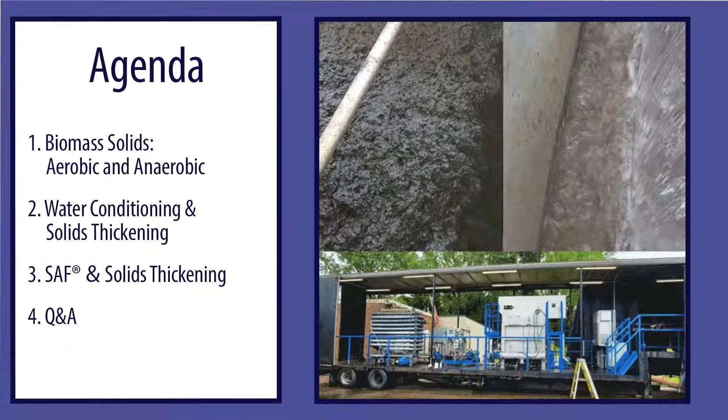Of course, we first have to define what that paradigm for solids thickening is. I thought I might just take a few minutes and talk about what thickening is, and first off, what are those solids? Typically in wastewater plants, industrial wastewater plants, you've got a primary stream, which is the raw water coming directly out of the plant, and that generally goes through some kind of pre-filter or pre-treatment technology. Very typical is a flotation technology, of course, which our technology, SAF, is one of those available.

So there's usually screens or some type of flotation technology, and then either it goes on to a POTW or some kind of discharge, or it may go to secondary treatment that the plant may have, where we've got biological processes. Of course, those processes are creating solids, and there's two that we typically deal with, one being aerobic, the other anaerobic solids.

We're going to hit on all three of those: primary, aerobic, and anaerobic, the two subcategories in secondary or biological solids. So typically what's done for primary, other than, I think people rely on their flotation to do thickening for the most part. Occasionally you run across where people have additional thickening or dewatering technologies. But secondary, of course, we see that even more so.

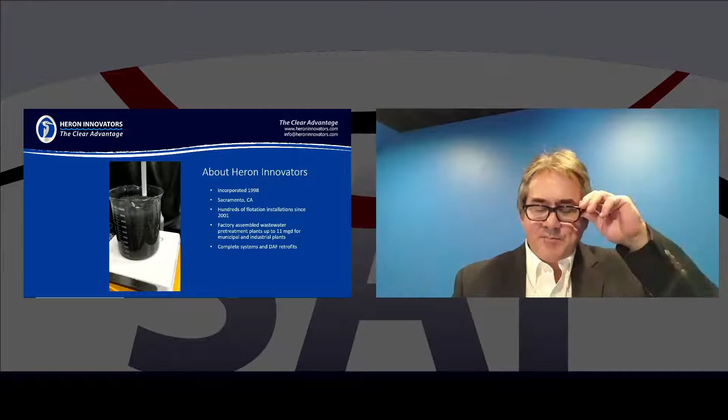I was walking a trade show, and I think it was FPSA, talking with a chemical vendor. That fellow mentioned SAF to me, and he said you can get by with less polymer with SAF. That piqued my interest - I thought I ought to check into it. He gave me John's number, I gave him a call.

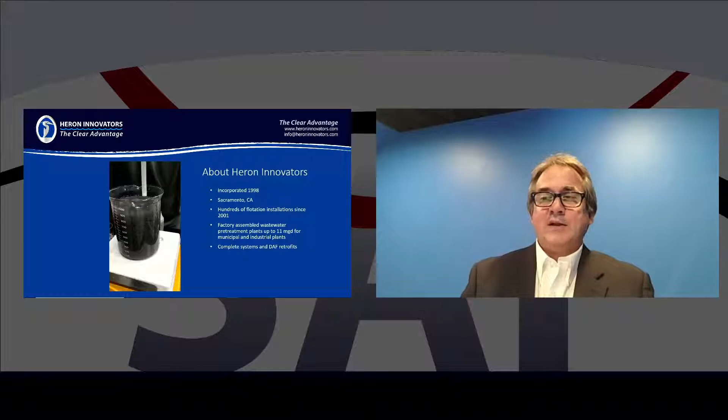This was all 3-4 years before I went to work for Heron. I called up John, and we started talking about this SAF technology, which I had never heard of before. John met me in Arkansas at one of my clients, and what you see in front of you is a jar test that we did in their lab. We had gone around throughout that morning and grabbed samples from various points in a number of their plants.

This particular jar has water that had gone septic - it had sat in a wet well for several days, the pump was down. This was some pretty nasty water, it stunk. So what you see - and I'm going to start this video here in a second - we've got a pin floc formed. There was a little bit of coagulant, a little bit of polymer. The coagulant breaks those solids out of solution, polymer helped bring them together, but maybe a half a ppm or 1 ppm of polymer. And this tube is coming from John's SAF lab unit.

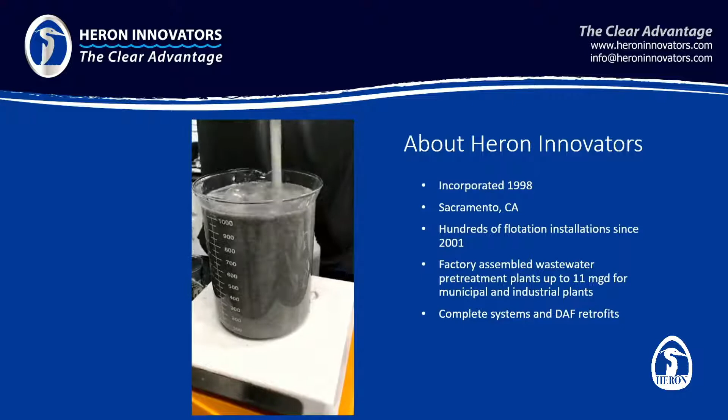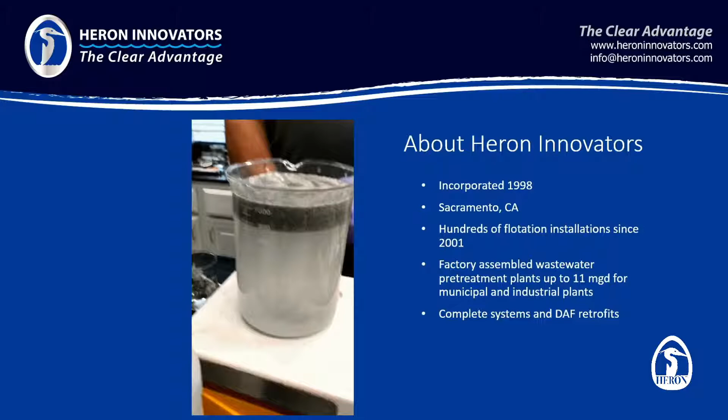So we're about to inject a charged microbubble froth, which is unique to SAF. Let me start this. I think what you see is those particles actually getting bigger as the air attaches, and what we're getting is a very high capture rate, a very fast rise rate, and a very stable float - all three of which was something I had never seen before. In fact, the environmental manager from this company said 'Wow' when we saw this.

So I went along with him, and we visited 3 different SAF installations across 3 different states. We ultimately ended up back in California, and we're going to talk about that application in a little more detail. But first, let's talk about SAF - what is SAF?

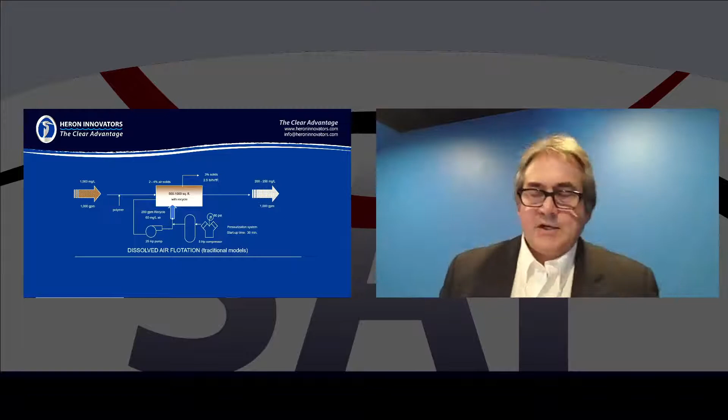Let's start by contrasting SAF with the traditional technology, dissolved air flotation. John, a lot of times we like to use the slogan: flotation without dissolved air. So the question is, how do we do that? What we're showing in this diagram is a flotation vessel, so you've got influent coming into this tank.

This could be a rectangular tank. There's also round tanks out there that are DAFs. And the way most of them work is you've got a recirculation stream going on here where you've got a recirc pump, and that's pushing against back pressure, and you've got air being injected into that.

So at pressure, air dissolves in water, and what we're going to do is dissolve that air up to the saturation point. How much is dependent on laws of physics, temperature, pressure, as well as the conditions of the water as far as how dirty that water is. So where that saturation point is depends on all those conditions, but when that water then re-enters the flotation vessel, you're now at a lower pressure, so you've exceeded saturation.

So little bitty soda pop bubbles are going to come out of solution, and they're going to work to float the flocculated solids. They're actually going to lift those solids from underneath, be floated and skimmed off and disposed of, and then into the thickening process. We'll come off of this at a certain thickness. What we'll talk about a little bit more is what do we typically see with the DAF, what do we see with SAF?

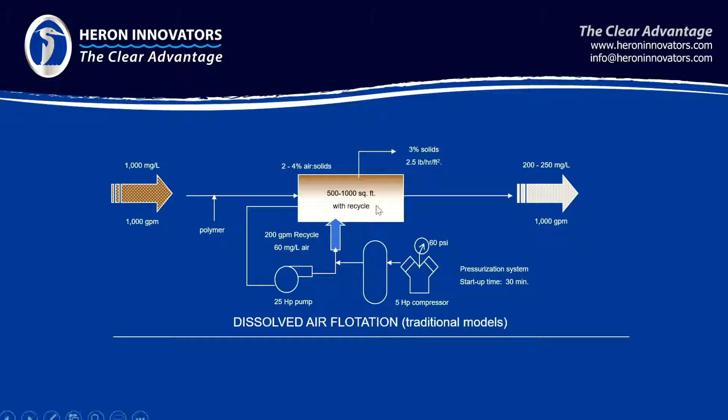So let's talk about SAF. As I said, SAF is flotation without dissolved air. So instead we're going to create a charged microbubble froth with a froth generator. It's a little skid, about 4 by 4, 4 by 6 foot in footprint, and it's going to make charged microbubbles. This froth is 40% air by volume.

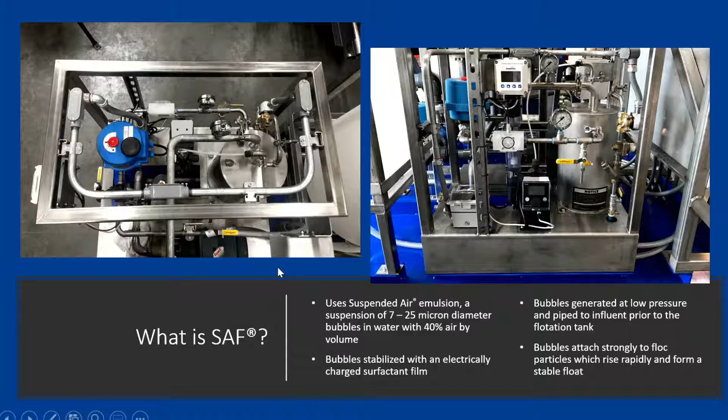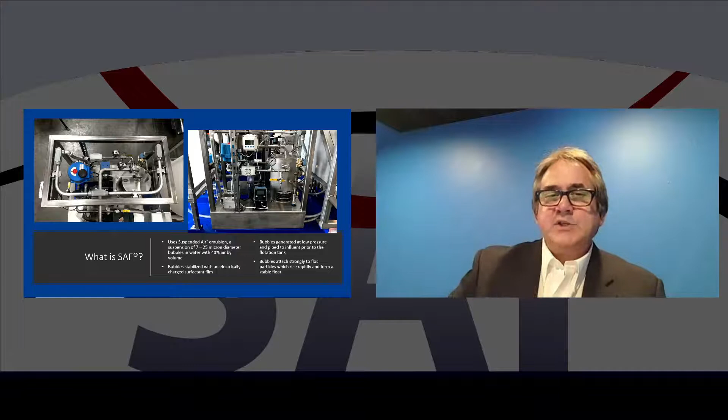And I'm going to ask John to explain a bit what these bubbles are. A lot of times we're saying, well, you're just getting more air into the system. Well, John, elaborate on that. What's different about these bubbles compared to traditional flotation bubbles?

Yeah, our bubbles are covered in a surfactant sheath that are 7 to 25 microns in diameter. And that sheath, that surfactant, gives us both surface tension advantages and charge advantages. It's electrostatically attracted to the particle. So we overcome the surface tension issues of the particle, and with that charge advantage, we see about 1,000 times the affinity for attaching to a particle in solution.

Given that our air doesn't coalesce readily, it takes a few minutes. A lot of our air is used, it's received better. We get a lot more air on the particles, and with that we get not only the charge effect on the size of the particle, giving us kind of a coagulation effect, which allows significant reduction in treatment chemistry, as well as a really fast rise rate because so much air gets on the particle.

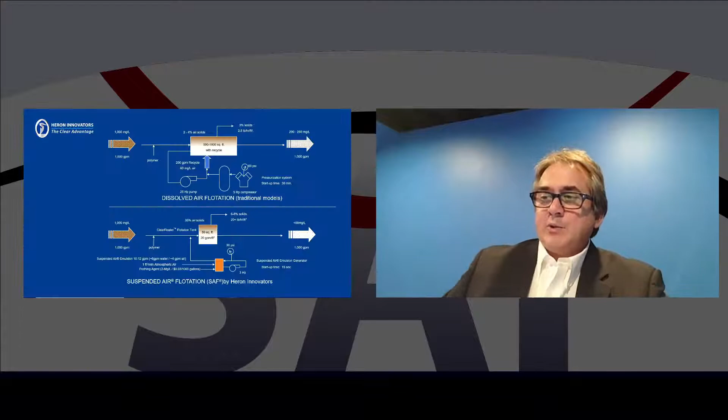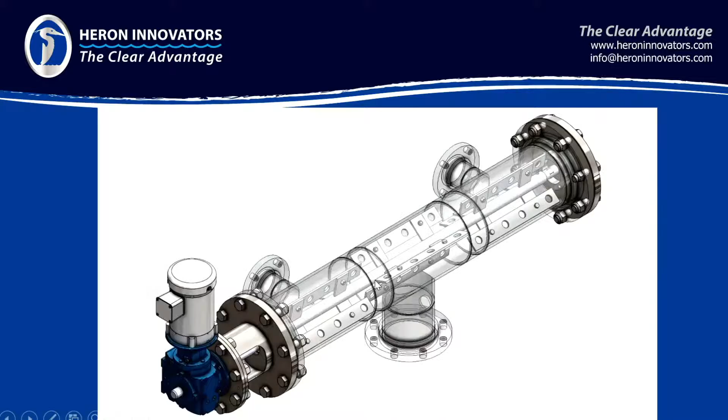So those bubbles, that charged microbubble froth, is injected here, 40% air by volume instead of 2 to 4% air that you normally see with the DAF. Is that right, John? It's about right. Saturated is usually 2 to 5%, actually used air is more like 2%. So a lot of coalescing goes on. So then the froth is injected here.

So the influent coming in, the froth is injected here where it's stirred in, and this is what we call a clear mixer. We've got the clear floater for the flotation cell, and then the clear mixer. So these paddles are turning, this shaft is turning about 10-15 RPM, driven with a motor at variable speed.

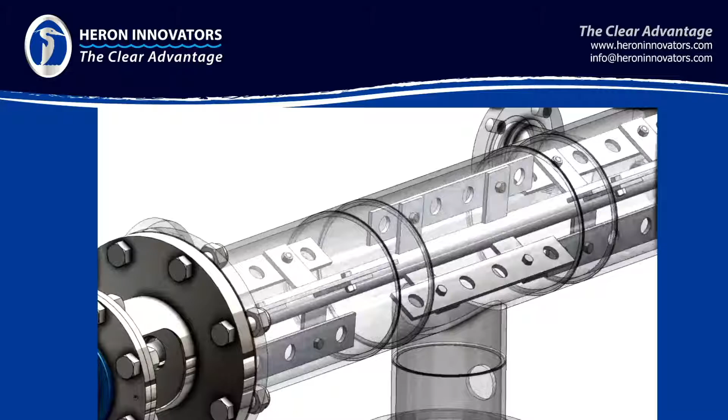So we're going to just stir those bubbles in to get a good air to particle reaction. Those bubbles are going to be attracted, because of the electrostatic attraction, to attach and encapsulate the solids just prior to going into the flotation cell. So that all happens right here, and then we go into the flotation cell.

We've got a lot of ground to cover. We've gone through SAF here real quickly. If you've got any questions on that, please feel free to type that in the chat. But let's move on.

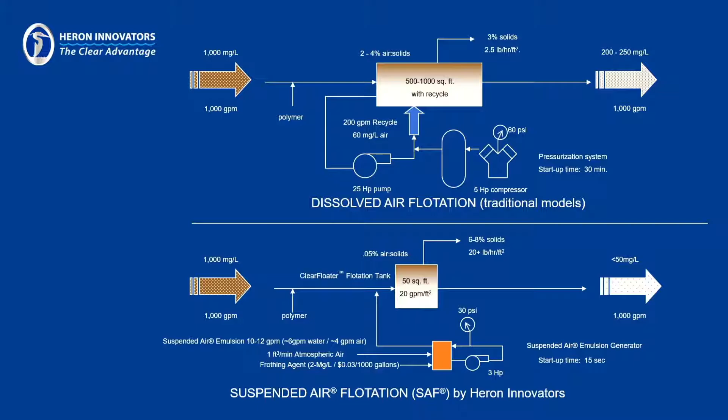It generates what the literature calls an aphron. What we've been able to do is figure out how to scale that, and it's all done in these SAF generators. One of the beauties of our SAF generator is that by the turn of a diaphragm valve, I can provide more or less flotation air to the process.

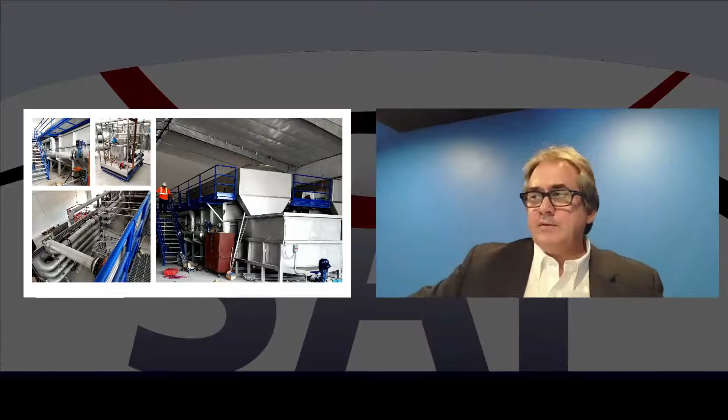In this picture on the right-hand side - what's the flow capacity of this unit, John? That's a CF1000. It's 140 square feet of float area, and that'll take you to about 2,800 gallons a minute in a solution that's, I think, under 5,000 parts per million. Don't quote me on that number, I have to go do the engineering on that again.

Bottom line is we've had this comment a lot - our footprint is just incredibly small compared to traditional flotation. If this were traditional flotation, would it be a fair statement to say this would be 3-4 times the size? Yes, I think that'd be a fair statement. We've got another tank right here.

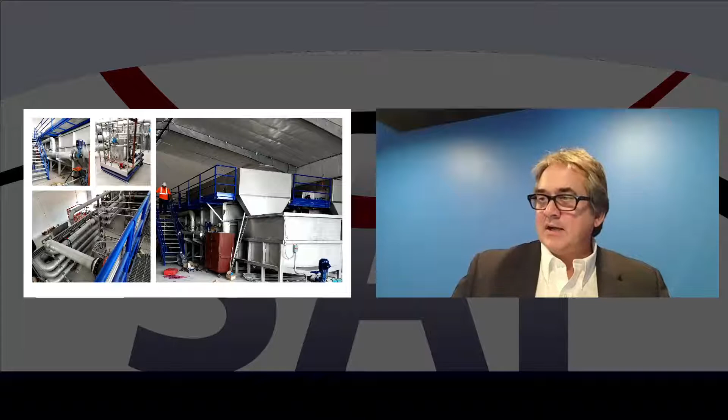So that really gets into solids thickening. This particular client is doing a second decant step. They're accomplishing solids thickening on the top by simply controlling the rake speed, as well as putting it on a timer - we can turn it off and on. Because the solids are so stable, they'll float for hours, which allows dewatering.

Another thing, John, I know I've seen you do this at trade shows - you'll actually take the solids in a jar test, put them in a beaker, seal it, shake them up, and they'll float again.

So I'll elaborate - we were at a small in situ trade show at a sewer plant where local sewer plants came, and we did just that. We took the solids, floated them in a mason jar, put the lid on, shook it up, and it refloated immediately. The operators were so enamored by that, one of them actually grabbed the bottle and started shaking it and redoing this - I think he did it 14 or 15 times before he finally resuspended all the solids for good.

That talks to what Jeff's slide was just showing, where we can skim off the top of our unit, get it as dry as we can, or dewater it to the degree we can. Then you can drop it into a container like that, let it sit, and it will float again. When it floats again, you'll get another 10-20% more dewatering, to the point where - that's a poultry plant there - they're easily above 30% solids consistently.

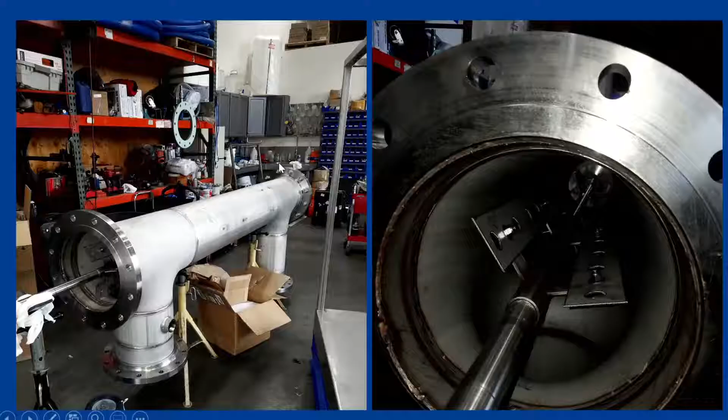This is one being assembled in our shop. You've got a drive on one end, this shaft with paddles. This is VFD controlled, influent coming in here. You've got the froth injected here. This is where we get that air to particle reaction, and then this would be attached to, this is the very last step before it goes into the flotation cell.

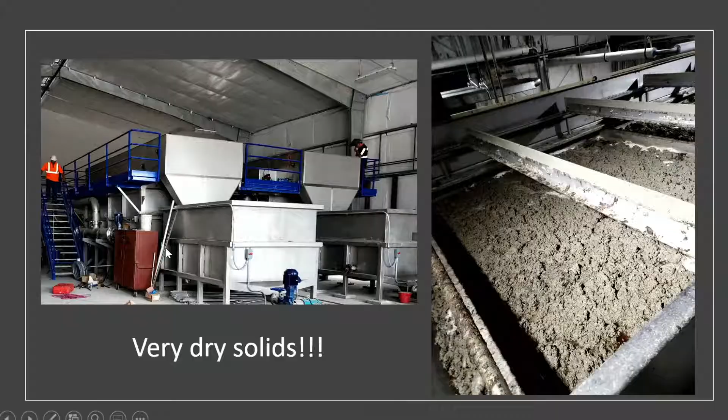And of course, this is turned 90 degrees. But back on this tank here, coming off an existing serpentine floc reactor, we custom built this, where this bolts to the flotation cell, and these were actually mixed liquor solids. So let's talk a little bit about what kind of performance we got on that.

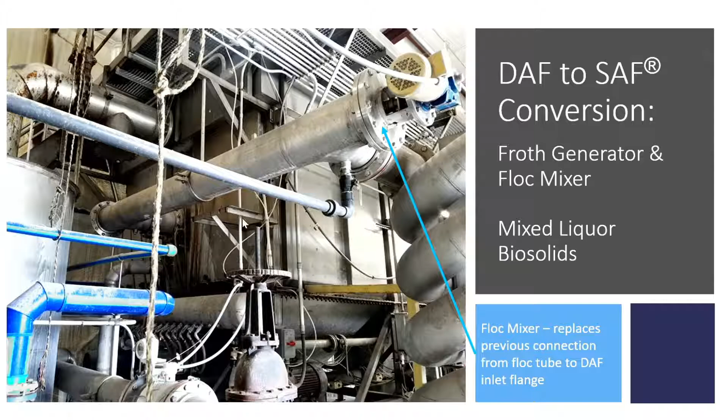John, anything you want to add on this? Well, I'm going to pull up a spreadsheet while you're talking. Yeah, so these are mixed liquor solids.

They're both from an MBBR. The primary flow is from an MBBR with clarifier thickened solids fed in intermittently during the day. So we'll see several thousand parts per million solids net coming into that float cell.

That float cell was restricted. They were doing, before we got there, that was a very large float cell, and they were kind of maxing out at 4 to 5 pounds per hour per square foot on the top of that, making it very difficult to reintroduce the clarified thickened solids from another downstream plant.

So in this installation, from the day they put that DAF in, they were at capacity, always trying to deal with how to reintroduce these solids from the downstream operation while continuing to treat the solids coming from the normal MBBR. It was, according to the client, a very difficult balancing act. We did the retrofit, and they haven't had capacity issues since.

And while achieving, I think, Jeff, you're going to show the slides, so I won't steal your thunder. I'm gonna turn it over to you, let you go. All right, yeah, I'd love to show this slide because this was what I thought was a bad experience for me.

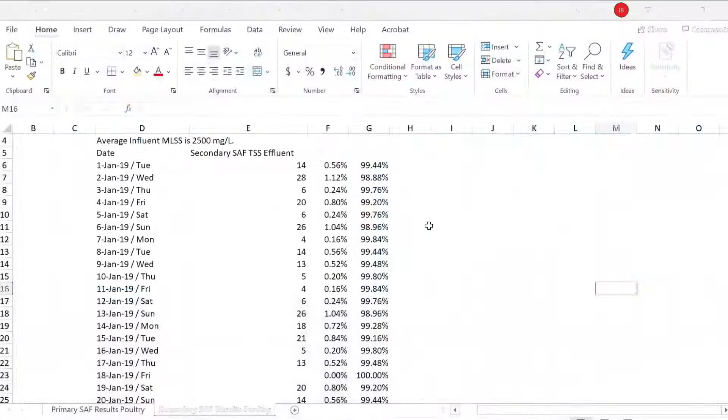So the environmental manager from this plant was good enough to share this with me. This came from last year, and as you can see, their average mixed liquor suspended solids level was about 2,500 milligrams per liter, or ppm, coming in, and I think they're running up to about 5%.

So this is really serving a dual role. First, we're clarifying this water, but of course, we're also thickening the solids at the same time. So they're running up to about 5%. Andy, the environmental manager, has told us he knows he can get these solids much thicker, but...

they're land applying these solids, which is often what we see at a lot of our plants, where the limiting factor isn't how thick we can get them, but where they're going after that. Since they're being land applied, that company doesn't want them any thicker than 5%.

John, you got any feel for what's realistic? How thick could we get these solids? I think aerated biomass, like we're looking at here, WAS, waste activated solids, and what might slough off of an MBBR, I think we've seen a maximum of about 10%. I'd say anything between 8 and 10% requires intensive polymer usage and real focused effort to try to dewater the solids. We easily get to 6 to 8%, and oftentimes even without a polymer we can achieve 4% in this kind of water.

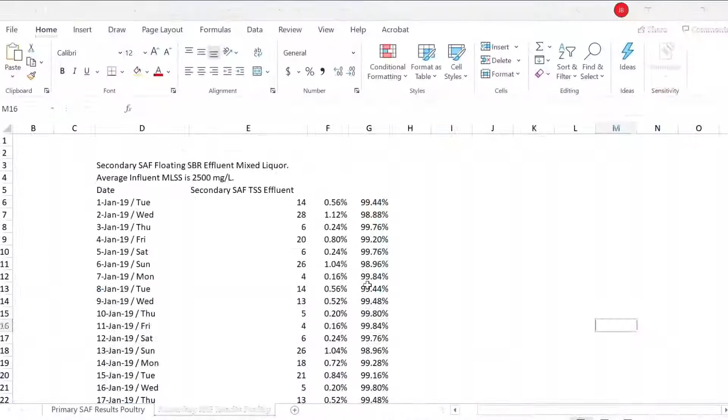If I remember right, they were running around 60 to 70% removal. As you can see in this chart, column G, that's the removal they're seeing every single day. But the other thing was that they cut their polymer consumption, didn't they, John?

Or coagulant and polymer. Yeah, both, right? They saved chemistry downstream on coagulant because the water was treated so well they could reclaim it immediately instead of going to further downstream treatment to remove more phosphorus. And the polymer, I think they eliminated the use of anionic polymer altogether, using only a lesser degree of cationic polymer.

And just to add one more thing, that project paid for itself in a few months, like 3 months, if I remember right. Yeah, and in fact, they ran for a while. I remember they did eliminate the anionic, but they also eventually stopped using coagulant. They're only using cationic polymer now, so it's significant. In fact, I remember it was hundreds of thousands of dollars saved per year in chemistry, and of course we're using less energy too with this system.

But let me jump back to this spreadsheet. I started to say a little bit ago, I thought this was a bad experience for me. One day when I walked in, you can see they're getting consistent 99% range removal with this. Then there was a day last fall when I brought a client in to actually see this in operation. The lab manager saw me walk in the door and said, 'Oh, I wish you had been here this weekend.'

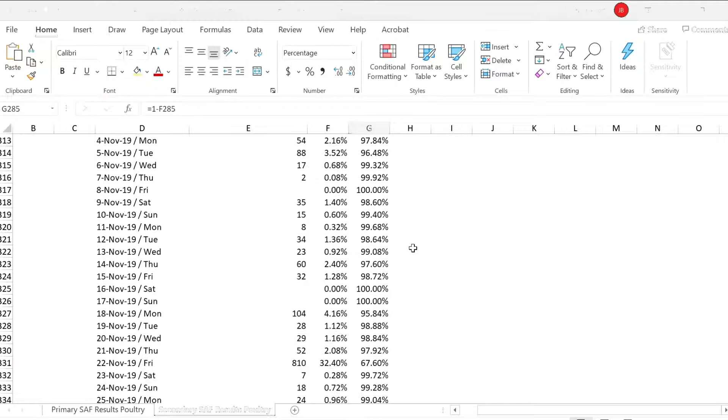So let me jump back — anything else you want to add on that, John, while I transition back to the slides? No, other than we've gotten a lot of mileage out of that one project. The customer was... while you're trying to find the slide, I kept selling it to them as we can get a lot higher solids. And of course all the engineering firms and chemical firms out there are telling them there's no way we can do this, and so on. To the point where we were actually standing on top of this unit at one point.

The customer saw that it was biomass and said, 'There's no way you can get even 7 pounds per hour per square foot on this kind of solids.' He was a poultry guy. I looked up at the customer and said, 'So what are we doing today anyway?' That particular day we were about 14 pounds per hour per square foot. The customer almost wouldn't believe it — it took a while to convince him that we weren't lying, nobody was lying to him. It was really what we were doing.

To the degree that we're very confident and will warranty anything at least 20 pounds per hour per square foot. We often size as high as 30. We've seen numbers as high as 45 pounds per hour per square foot. All right, Jeff, I'll send it back to you, Jeff. Yeah.

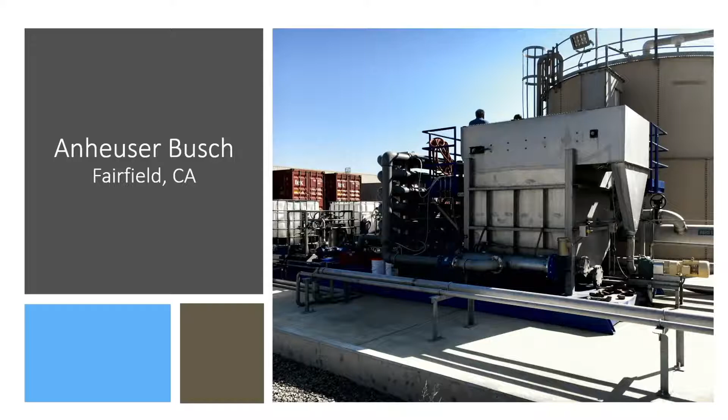So this unit, again, on anaerobic solids, talk about that a bit. I don't remember the loading that well, this was an older project of ours. But we were achieving, for a few years while they were still running that as their treatment system, better than 98% removal with almost no maintenance, and the polymer consumption was around 30 parts per million. The solids coming at us, I don't have a clear recollection, but I want to say they were around 1%.

And John, what kind of numbers did we see on this? Well, I remember these numbers, let me answer my own question. This particular unit has 17.5 square feet of flotation area. Our goal was to prove that we could load at 28 pounds per square foot, get into the 5 to 6% range on solids thickening, and do that very economically.

And in fact, we've already been awarded this project, and if I understand correctly, it was simply on ease of operation, the operators all loved it because all they had to do was come in and hit a button and it started up, making good water. Another large part of the decision-making process was cost of operation. When they looked at a 20-year life cycle cost, it was considerably cheaper when you look at the amount of polymer needed, as well as the ease of operation.

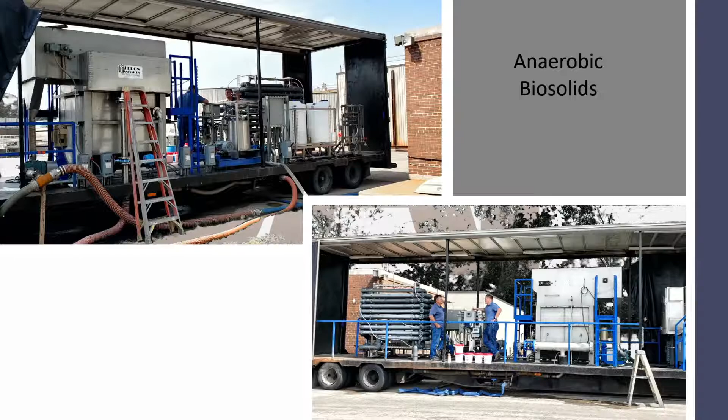John, anything else? Yeah, I think we'd be remiss if we didn't mention how robust the process was compared to the competitive process. It seemed like within a few days of us leaving, the engineering firm and the operators ended up running the plant themselves, starting and stopping it on their own, changing conditions, losing the process, bringing it back. The quote that came back at a board meeting was something like, 'it's stupid easy to run,' and we really try to do that. We make it very easy to operate, and it's a very robust process, whereas our competitors, I'm not sure they ever established a consistent running process in the entire trial period. That gave both the municipality and the engineering firm a lot of confidence in our product.

Jeff, you're on. Yeah, is this video coming through? Yeah, yes it is. So talk to us about what we're seeing here.

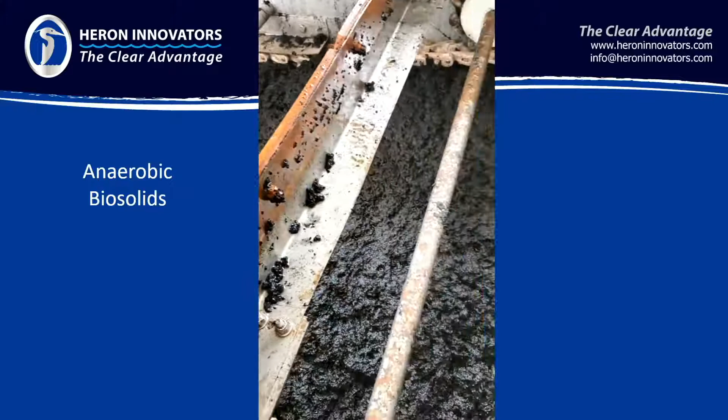So that's actually the floated solids from that anaerobic digester. I think for most of the trial we were loading at 30 pounds per hour per square foot. This is all biomass. I believe we have a few data points where we really wanted to push things, where we got above 40, into the mid-40s. It's just not a parameter we're very sensitive on when we're doing this, which is another distinction with our competitors. You can see how thick that is.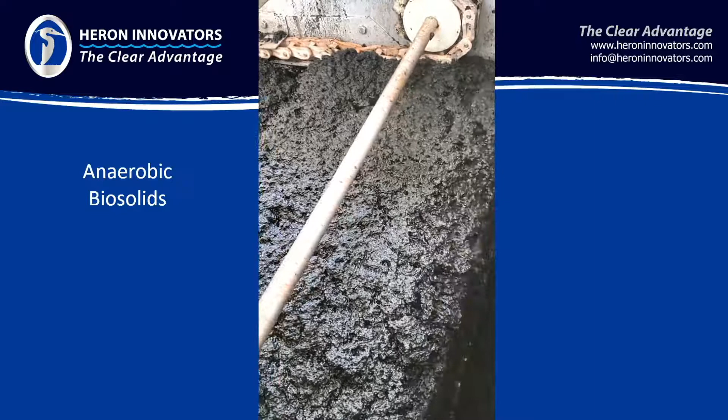You're going to see the blade come by here in a minute. The blade's probably 6 to 8 inches thick, and it's completely buried in the solids. Let's see if we get that. You can see it in there, right there. It's completely buried in the solids, and we're still removing water at 99% removal.

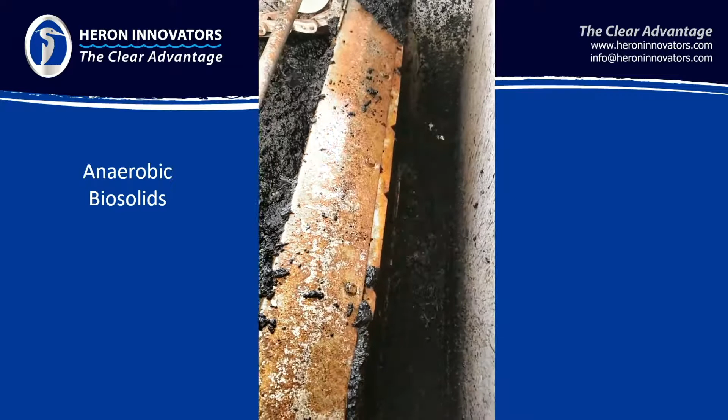Yeah, in fact John, there was a day when I was there that we ran it closer, we were in the mid-40s, pounds per hour per square foot. 50 pounds per square foot per hour, and still getting very clean water. In fact, I think this particular video shows what's coming over the weir.

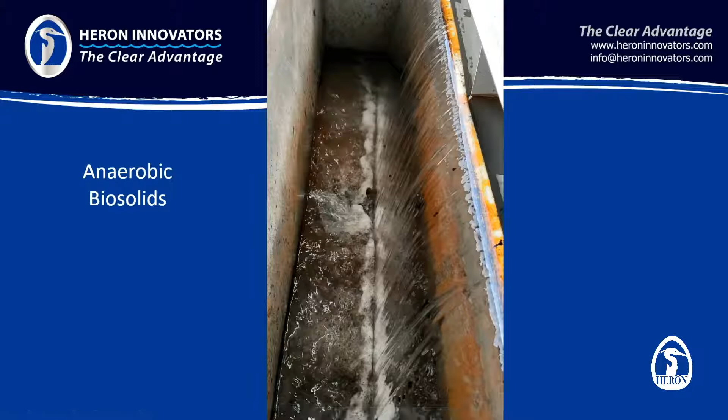Even though we're seeing a little bit of floc coming over at that time, because we were really trying to push it hard, we were still seeing around 99.5% removal. In the entire time I was there, we did things to try to disrupt the process to see how low the polymer could go, and of course we saw some substantial carryover. But when we got a stable unit, we could run it indefinitely, and we were consistently above 99% removal. The other thing is it seems like even in most waters, that solids flux parameter, we have a lot of breathing room there. Our units are just not as sensitive as competitive technology to that number.

Well, I think that's it for my slides. Andrew, do we have any questions that have come in? Yes, we do. I didn't want to interrupt anybody because you guys had a lot of really great information and really good results, and I wanted to make sure everybody got a chance to hear those. But I do have a question that came in.

What is the upper limit for dewatering biosolids with SAF? So, I did answer that in the presentation, but I think it might warrant repeating. In the aerobic world, it seems like 10% is probably the upper end, 8 to 10% being difficult to get to, 6 to 8% being kind of a normal thickness of that biomass. In the anaerobic, it's kind of the same range. And when we get into the primary solids, especially if the primary solids has some fat in it, we're looking at somewhere north of 30% solids as a pretty doable number for us.